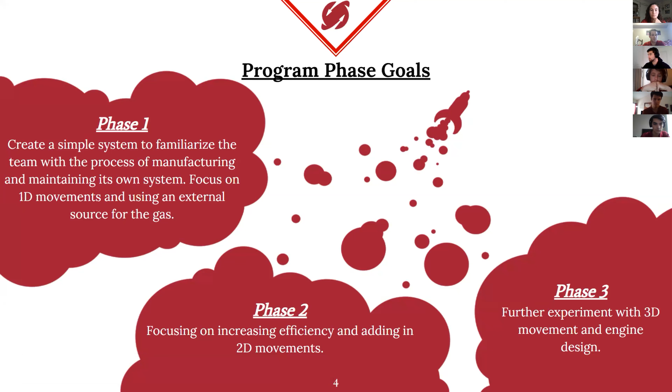Instead of yearly goals, we intend to outline our goals in phases which can be completed at any time. Our current phase goal, phase 1, which we're in right now, is to create a simple system to familiarize ourselves with the manufacturing and maintaining of a system. The focus will be on one-dimensional movements and using an external source for the gas.

Phase 2 will consist of focusing on increasing our efficiency and adding in two-dimensional movements. Phase 3 in the future will include further experiment with three-dimensional movement and engine design.

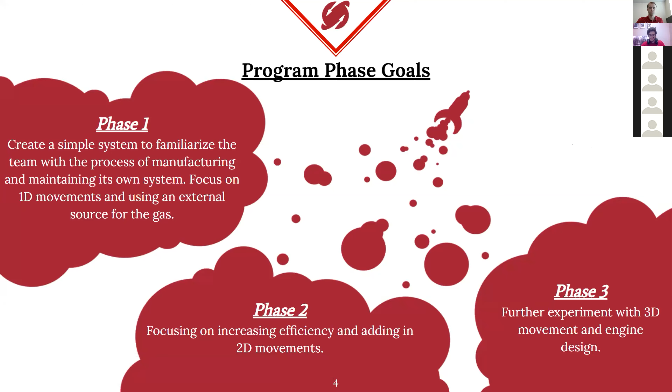Hello, my name is Nathan Humphrey, and we'll start looking into this phase of this project starting from an administrative perspective.

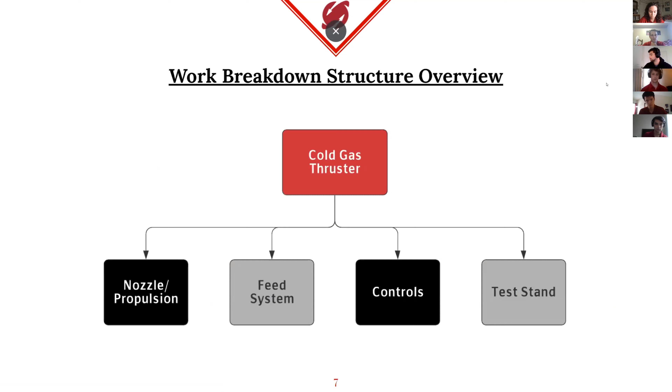For this project, we've broken it down into 4 subsystems: propulsion, feed system, controls, and lastly, a test stand. The propulsion subsystem, along with doing analysis from a thrust and propulsion standpoint, is also in charge of the nozzle geometry and material, as well as the thrust chamber assembly, manufacturing, and part selection.

The feed system, on the other hand, is in charge of anything leading up to that thrust chamber. So that's the gas selection, pressure regulation, as well as any of the piping and tubing that goes into that.

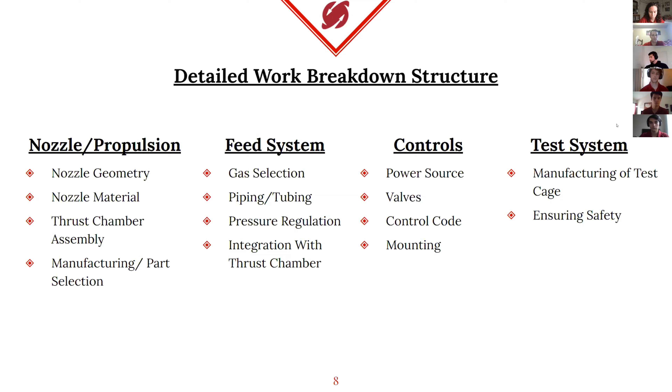The controls is where our power and electronics are, as well as our overall control system. Lastly, we also have a test system. This is just to ensure we can safely test and prove the feasibility of this cold gas thruster system.

As far as for this phase, we set out a couple requirements we want to reach. The first is to maintain consistent hover. So we want this cold gas thruster to be able to maintain that hover, but for this phase we are going to restrict it to 1 degree of freedom, so just that up and down direction.

We also want to make sure we're building this with upgradable components. When we say this, we mean that the part selection here is to prove plausibility of our design, with the idea that we can later update these components to improve efficiency or improve how well our cold gas thruster system functions. We'll also be using an external gas system.

The gas storage will not be on the actual thruster that is hovering. This is mostly to meet that hovering goal and reduce the weight. We'll also be having a throttleable system, once again tying into that overall consistent hover goal. But we also want that throttleable system to be pre-programmed.

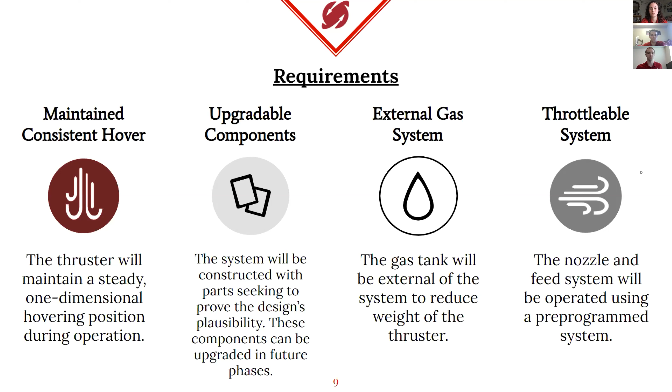As far as what we've completed so far, we started doing a lot of research, looking at possible designs, what people have done in the past, as well as what conditions we could expect our cold gas thruster to experience. Based on some of the initial conditions we found through our research, we started doing preliminary calculations, and by analyzing these calculations, started to determine some operating parameters that our cold gas thruster system could experience.

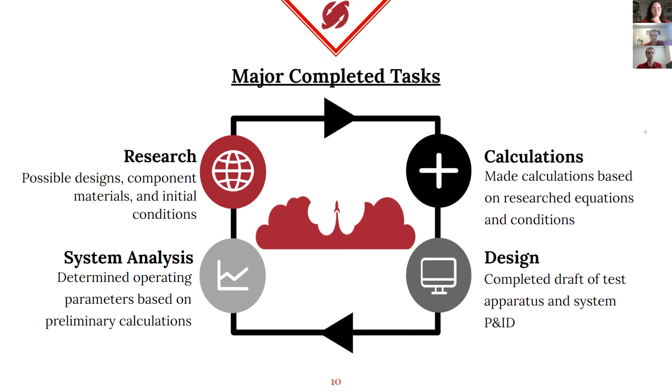Lastly, we started to do some design work. Namely, we completed a draft of our test apparatus and also did some conceptual system work in a P&ID.

Looking at the overall budget of this system, right now our preliminary budget is right around $1,600. As we go into each of these subsystems, we'll dive more into where these potential costs are coming from.

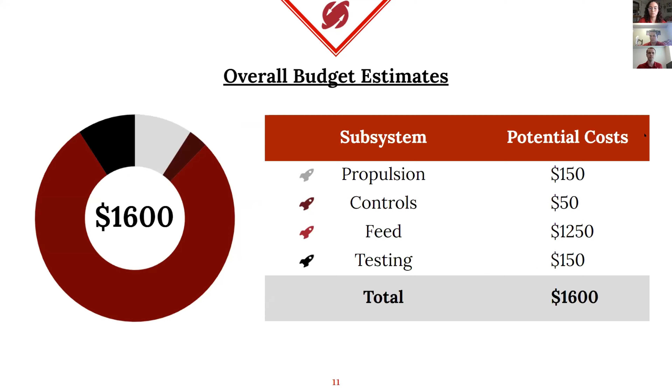Looking forward from an administrative perspective, we always want to be implementing and improving, refining that budget and bill of materials to accurately reflect our current design as we improve it. We'll also be developing a concept of operations diagram. Lastly, we'll want to continue to detail major technical milestones throughout this project as we reach them.

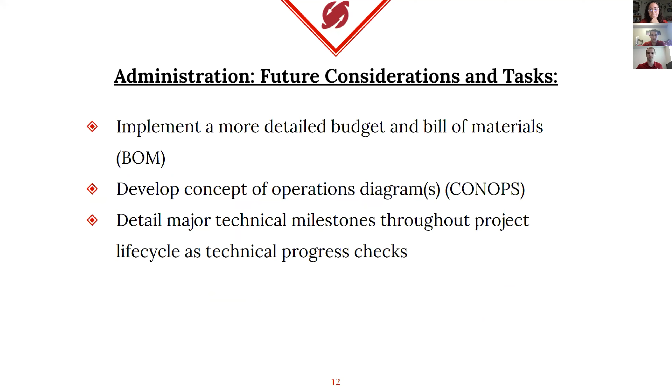From here, I'll be taking us through the systems engineering designs.

Below is our technical flowchart. We initially did some basic research on previous cold gas thrusters. From there, we did some initial systems engineering and administrative detail work. Following this, our propulsions team made MATLAB system simulations.

We began basic chamber and nozzle design phases. Currently, we're working on component selection for our feed system and control system. The control system is working on determining a method of error calculation, and we are working on choosing a material for our chamber and nozzle, following which we will determine the final nozzle expansion angle and length.

After this, in the future, we intend to do a CFD analysis on our chamber and nozzle. Using this CFD analysis, we'll take those blueprints and manufacture the chamber and nozzle. Following this, we'll integrate the control system, feed system, and nozzle system together.

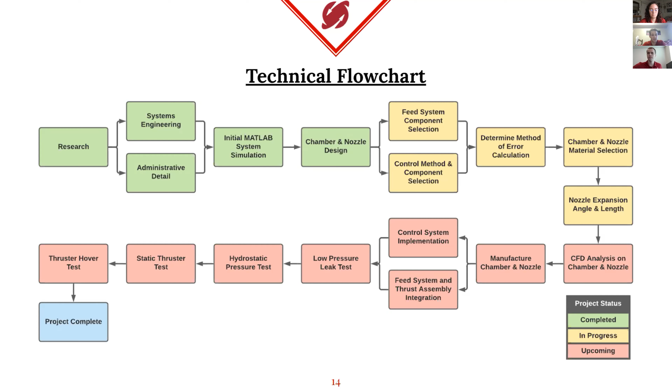With this full assembly, we'll begin a low pressure leak test. Given successful completion of that, we'll do a hydrostatic pressure test, and then after that, a static thruster test. Given successful completion of these three, we'll do a thruster hover test. Given successful completion of this, we'll consider the project as being completed.

This is a general system design overview. The system is going to be made of modular components, so we can substitute parts out with minimal impact to various aspects. The safety factor is going to be 3.5, as is required by the ASME standards.

The working fluid source is going to be at 2.5 megapascals or greater, as is necessitated by the thruster system. We're going to regulate it down from there if necessary. The working fluid is going to be air, as it's cheaper, more sustainable, and less environmentally harmful than other options. The working fluid temperature is going to be at room temperature because the compressor will be stored at room temperature.

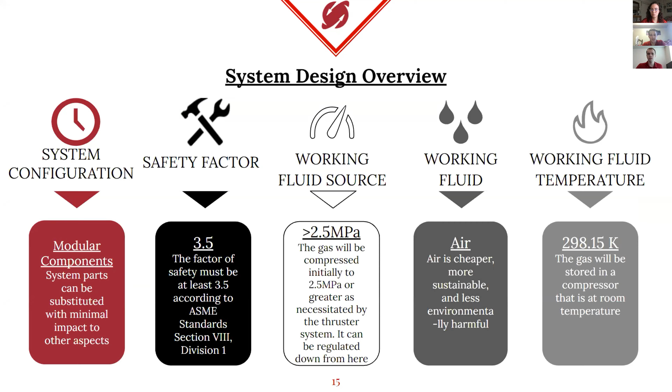This is our system feed P&ID. The air begins in our high pressure storage tank. The compressor flows out through various gauges, the thermocouple and the pressure gauges, to allow us to take data compared to our predictions. We have a pressure regulator down that may be included in our compressor.

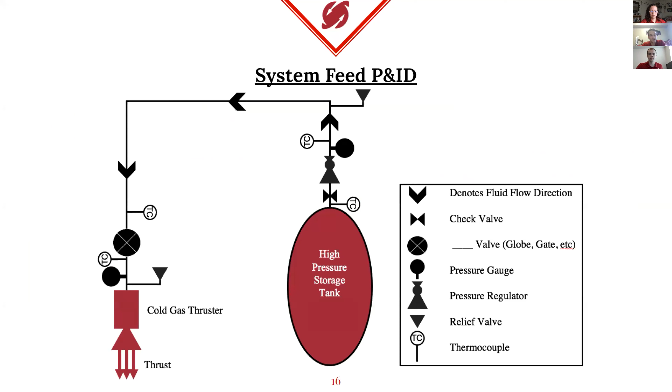We aren't entirely certain on the one we're using at the moment. From there, it flows around into our control valve, which will regulate the flow of gas into the cold gas thruster and allow us to achieve variable thrust.

This is one of our initial thruster design concepts. It includes a bolted flange attachment method. There's an entry port on the top half for air to enter. From there, the system is going to be manufactured in 2 halves and attached with bolted flanges on the outside. An O-ring will be placed in between these 2 halves to minimize any potential leakage.

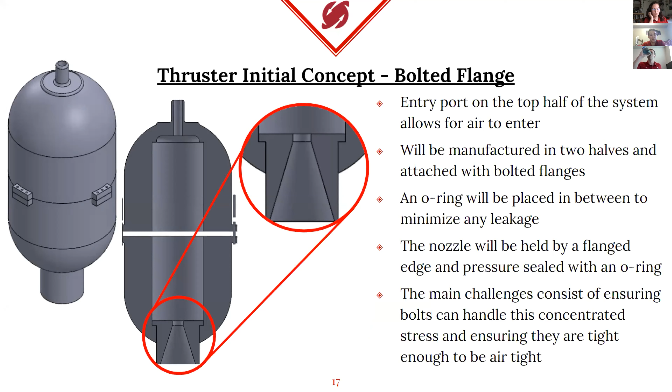The nozzle will be held on by a flanged edge and pressure sealed with an O-ring. The main challenges of this design consist of the fact that the bolts will be handling a very concentrated stress and ensuring that seal is airtight.

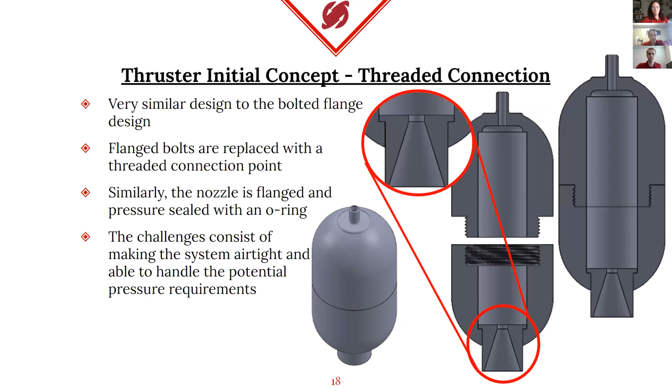This is our second potential design that we've considered so far. It is very similar to the first, except that the attachment method consists of a threaded connection in the center. The nozzle is similarly flanged and pressure sealed with an O-ring, and the challenges of this also consist of making it airtight and able to handle the potential pressure requirements.

This is our working fluid trade study. We compared standard cold gas thruster working fluids, namely hydrogen, helium, nitrogen, and air. We rated them based on various criteria to see which would be the best option.

We did safety based on the fact that air and helium are inert and non-toxic to humans. We did affordability and found that air and nitrogen systems are both easier to acquire and the systems are generally cheaper.

The accessibility of air is far easier than any other option, as you can use a compressor, and the system itself only has to be airtight, whereas helium and hydrogen would require being much more over-engineered as they're much smaller particles. The performance of hydrogen was found to be the highest, as it has the lowest density and as such the highest specific impulse.

The fluid operation range criteria found that helium would be almost impossible to condense at the pressures we're working with, whereas air will be just below its critical pressure. Nitrogen and hydrogen were found to be very likely to condense at the pressures we need. Taking all these criteria, we found that air would be the best of the working fluids available.

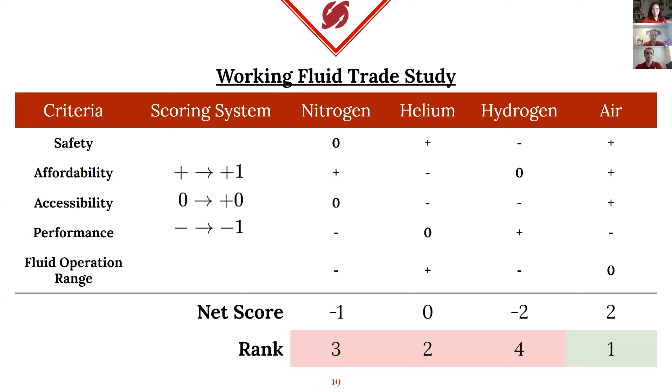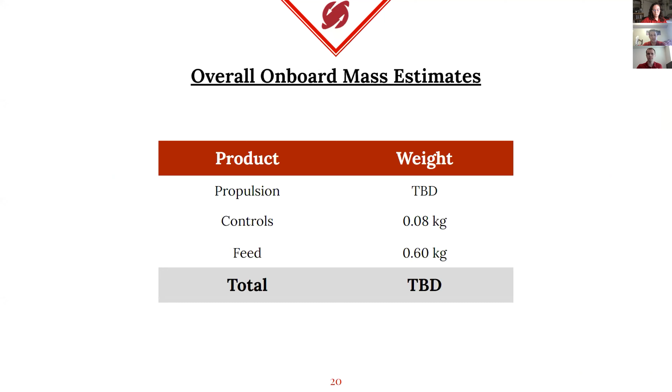Hey everyone, my name is Garrett, and I'm on the Phobos cold gas thruster propulsion system.

Taking a look at our nozzle design program and assumptions, we decided to go with MATLAB as our software of choice when making some of the initial calculations. Our team is much more comfortable with MATLAB than any of the alternative software, so that's what we chose.

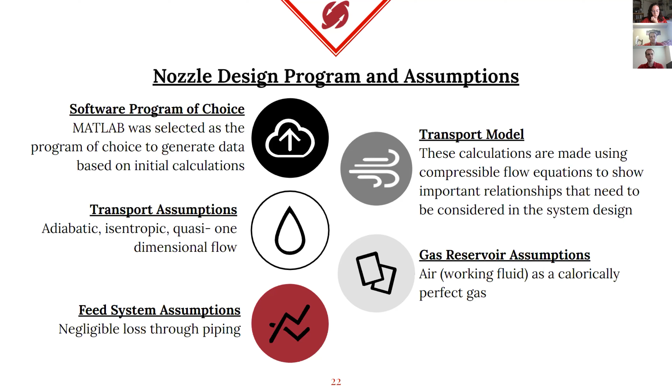The initial calculations we made to find some of these parameters were made using compressible flow equations to show some of the important relationships we need to be looking at when designing our system. The assumptions we made for these program calculations include adiabatic, isentropic, quasi-one-dimensional flow, a calorically perfect gas as our working fluid, which, as previously mentioned, was air, and negligible loss through the piping and valves. These assumptions were made for simplicity of the calculations.

Below are some of the operating conditions we used for our MATLAB simulation. As you can see, we chose 100 newtons for our thrust. We chose this because we believe the maximum weight of our system is going to be roughly 100 newtons, so we wanted a thrust that would be able to match that and keep our system hovering.

We chose an initial tank total temperature of around 300 Kelvin. The reason we chose a thrust efficiency of 90% was to keep our calculations liberal and keep the parameters liberal. The chamber pressure we chose was around 2.5 megapascals. The last three operating conditions are based on the working fluid we chose, which was air.

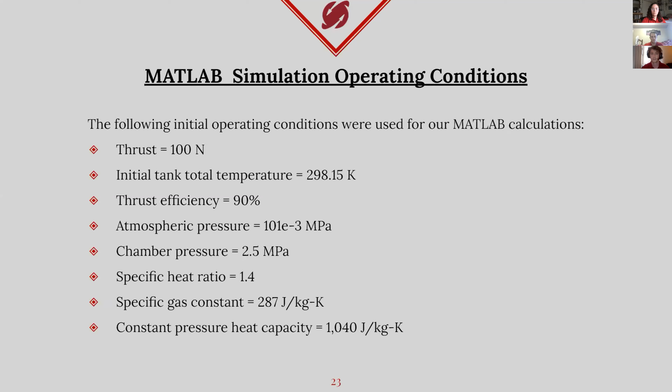My name is Tanner Tripoli, and I'll be taking you through the propulsion system analysis of our cold gas thruster. Here we have mass flow rate plotted versus chamber pressure.

As you can see, we're currently looking at anywhere between 2 megapascals and 3.5 megapascals, which is the bounds of the larger graph here. The smaller one is the full curve from 0 to 10 megapascals, and you'll see that on the rest of the graphs after this slide.

The lower pressure of 2 megapascals was selected because the mass flow rate begins to level off after this point, which means the system is much less sensitive to fluctuations in chamber pressure, which will occur due to the inconsistencies with our air compressor. We chose an upper pressure of 3.5 megapascals to avoid our air becoming supercritical, and air becomes supercritical at about 3.7 megapascals, and hanging around that range is the worst place to be.

We decided to select a chamber pressure first so we could begin design and structural analysis of the thrust chamber assembly.

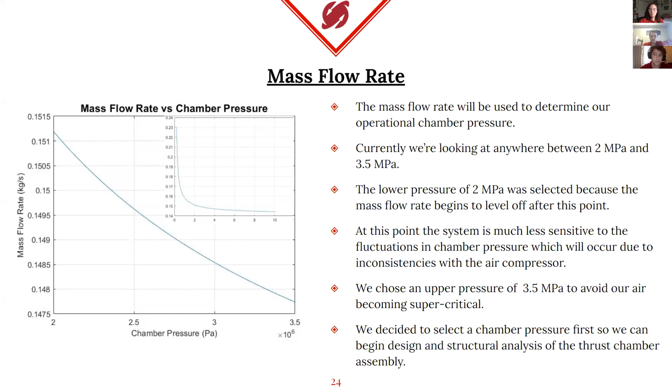Here we have optimal throat area and area ratios for choked flow, both plotted against chamber pressure again. What we can gather from this is that continuing to increase the chamber pressure would mean designing a larger nozzle and a heavier thrust chamber, increasing weight. Once the throat and area ratios are decided upon, they will remain constant, unlike the other variables in these graphs.

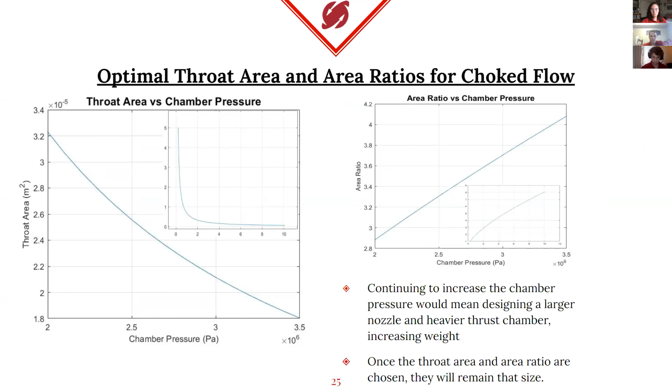Here's exit velocity and exit Mach. There's not much to be said about these, but they do show that chamber pressure is directly linked to specific impulse, as exit velocity is directly proportional to ISP, and as chamber pressure increases, so does exit velocity.

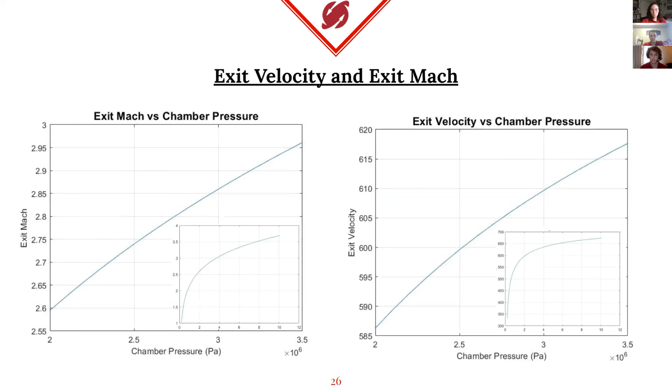All right, so here we have a simulation for a single point in our MATLAB code. For this, we chose a thrust of 100 newtons and a chamber pressure of 2.5 megapascals, or 360 psi. We chose this chamber pressure because it's well below the critical point of air.

Plugging those into our MATLAB simulation, we get an area ratio of 3.3, a throat area of 2.6 times 10 to the negative fifth meters squared, and an exit area of 8.5 times 10 to the negative fifth meters squared, an exit Mach number of 2.74, a mass flow rate of 0.15 kilograms per second, and an exit velocity of about 600 meters per second.

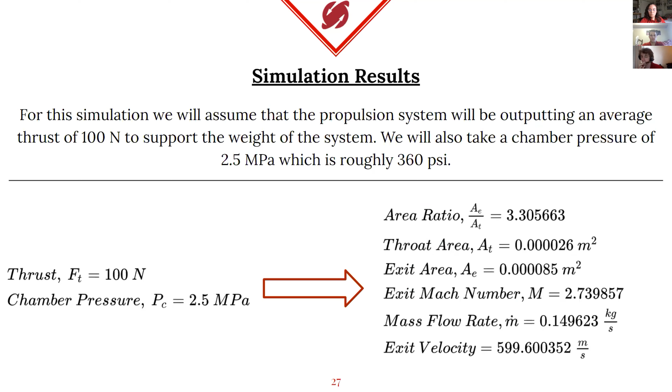So looking at the potential for the nozzle integration technique, we have decided that we're going to go with a conical design for the nozzle. However, we have not officially decided how we will integrate this nozzle with the chamber. Currently we're looking at using either a flange attachment, as Tyler mentioned previously, or a threaded attachment. We have not completely decided which one we will go with yet, but we will be looking at this in the future.

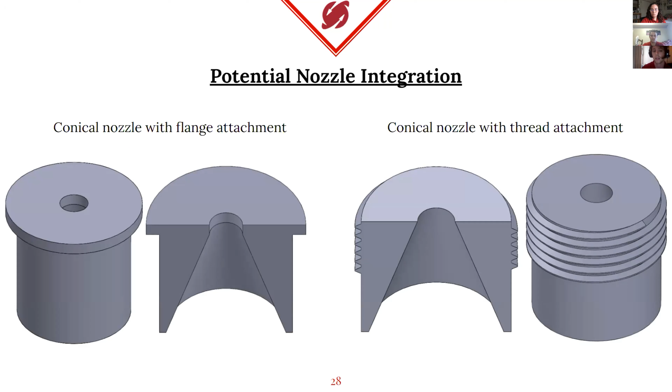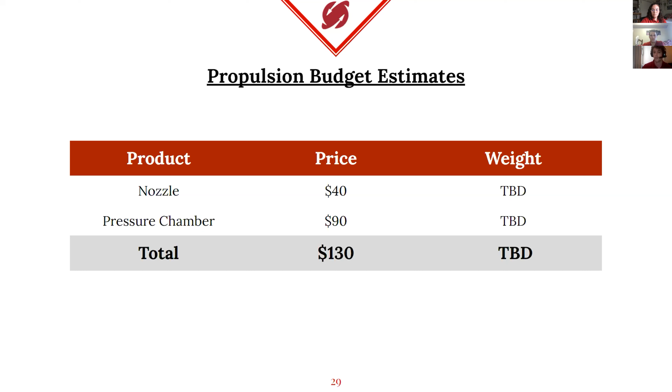These price points you see here are based on what we think would be an upper limit to the threshold of what we'd be paying for the materials for the nozzle and the pressure chamber. These are based on some of the sources we found looking at manufacturing these out of an aluminum alloy. We have not fully decided on that, but this is what we think will be an upper limit to that threshold.

Moving forward with the nozzle design, the first thing we'll be looking at is the material selection for the nozzle and the chamber. Once we finish that, we'll be making a MATLAB code to find the expansion angle of the nozzle and looking at the length of the nozzle as well, so that we can begin looking at manufacturing the nozzle and the chamber. We will also be considering the thermal analysis as well as the structural analysis of the thrust chamber assembly before manufacturing, using some CFD analysis.

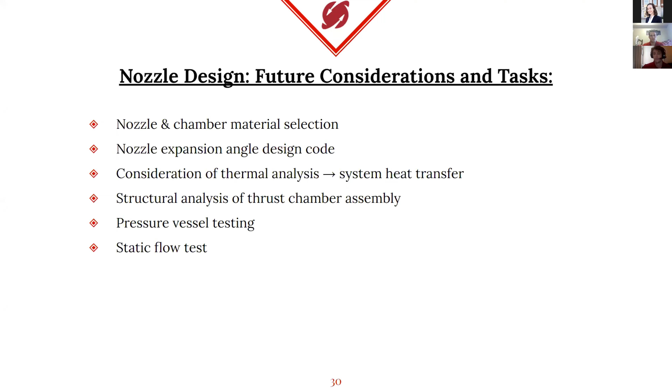Once we manufacture, we'll be looking at pressure vessel testing for leaks, and testing to ensure that the pressure vessel can handle the high pressures we're going to be putting it through. We'll follow that with a static flow test before we get to the actual hover test.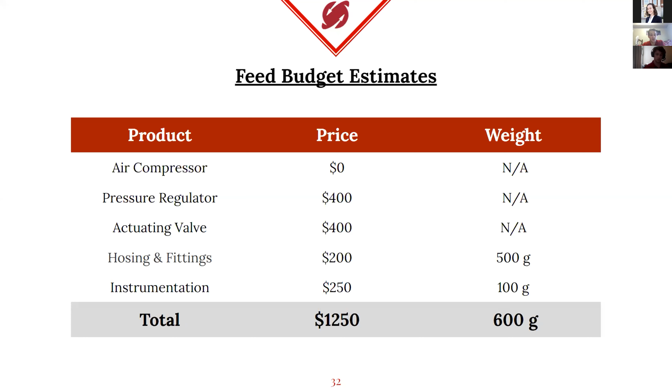We have the actuating valve that controls will require to maintain the variable flow later. We have our various hosing and fittings approximated to cap out around $200, with an onboard weight of 500 grams. The various instrumentation, being the pressure gauges and thermocouples, we've put down as about $250, with an onboard weight estimate of 100 grams. This brings the overall feed price to about $1,250 and the overall onboard weight to about 600 grams.

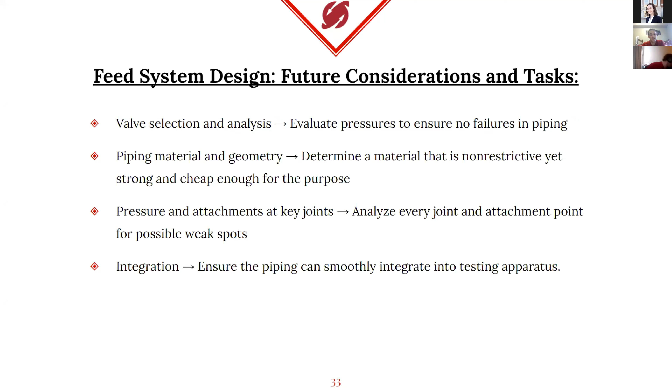For our feed system future considerations, we need to go through valve selection and analysis to ensure there are no failures throughout the piping. We need to weigh various piping material and geometries to determine a material that's non-restrictive, yet strong and cheap enough for our goals. We need to analyze the pressure and attachments at our key joints to make sure there are no possible weak points where it could fail. Finally, for our integration, we need to ensure that the piping can smoothly integrate with the testing apparatus.

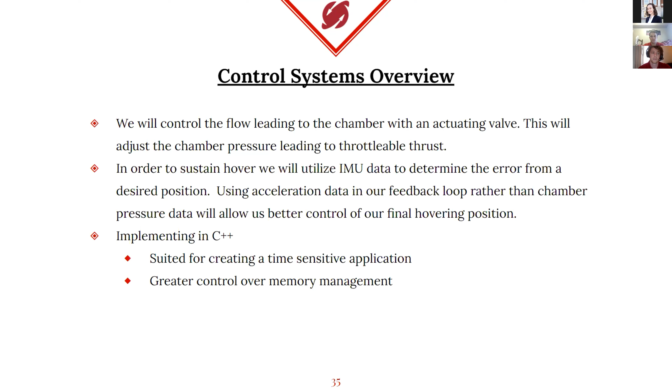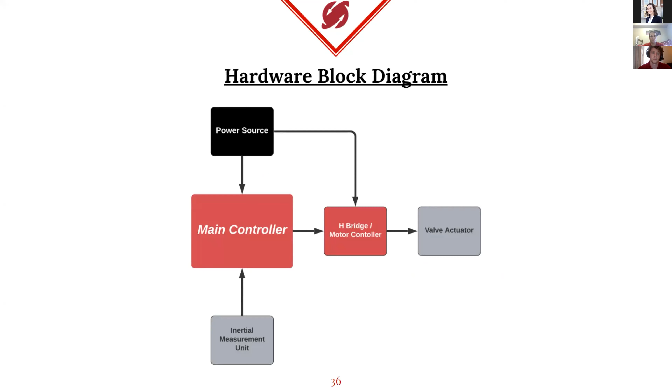Here's the hardware block diagram. The main controller receives data from the IMU. From here, the necessary adjustment to the valve is calculated and passed through a motor controller or H-bridge in order to use the valve actuator.

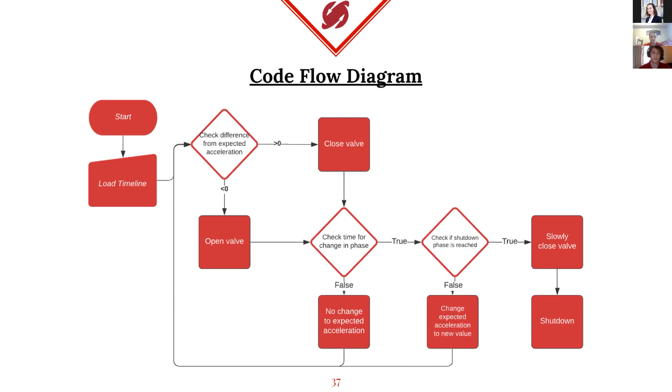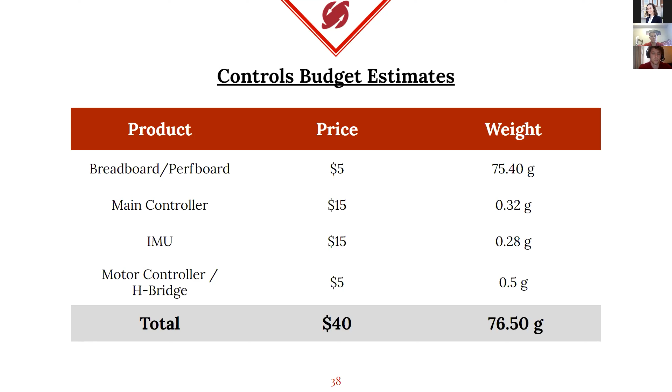For the control system's future considerations, the best method of calculating positional and acceleration error from IMU data needs to be determined. Additionally, once a valve is selected, the necessary voltage and control signal to actuate the valve will need to be adjusted. The code diagram needs to be refined, breaking general steps into their more precise component functions. The diagram also needs to show which processes are sequential and which can be run in parallel. Finally, an important consideration is determining safety conditions in the code to trigger shutdown in the event of failure.

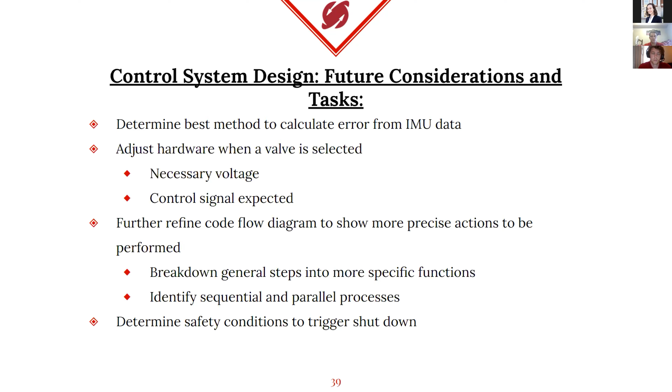We decided to build a test cage to house our cold gas thruster. The cage is designed to safely test the hovering capabilities of the cold gas thruster. For our first design iteration, the test cage will feature a center rail system restricting motion to 1 degree of freedom. It also allows for isolated testing of the engine's ability to control thrust level with simplified closed loop feedback, and parts can be removed to test for stable hover with additional degrees of freedom in following design iterations.

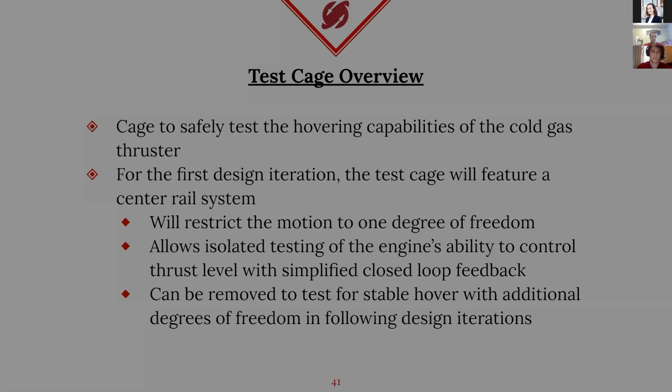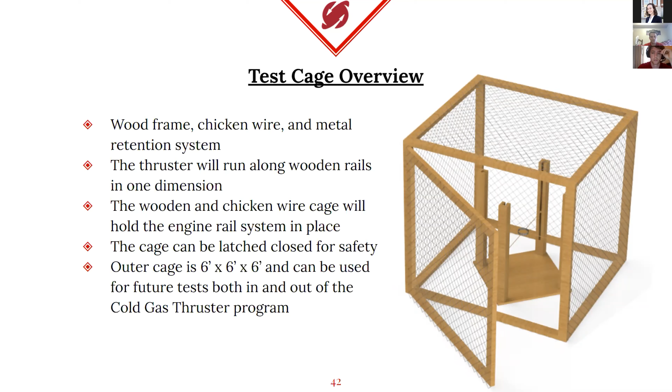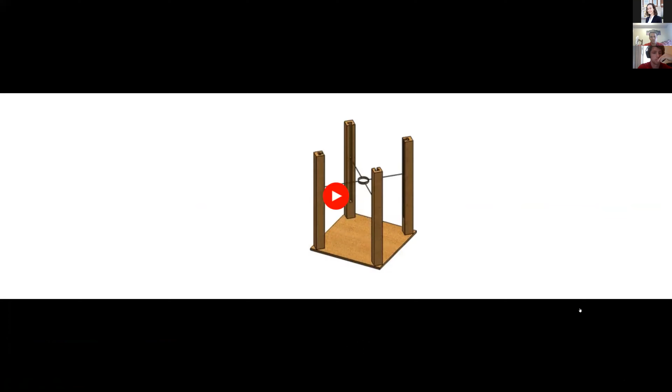Here we have a short video that shows you how the wooden rail system and metal retention system will work with the engine. You can see a closer diagram there on the right.